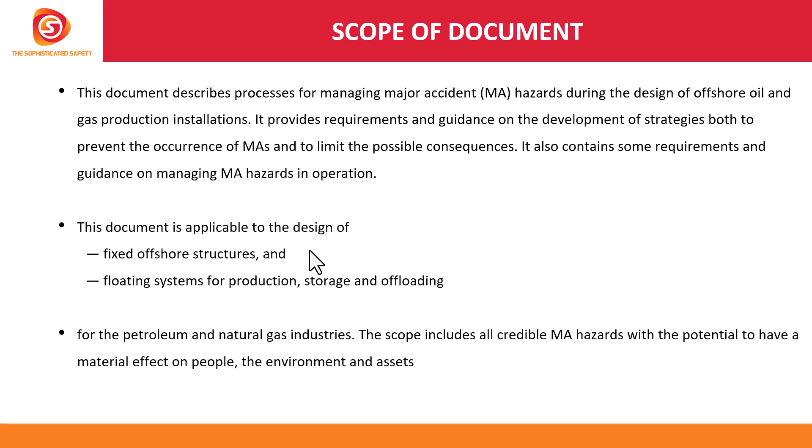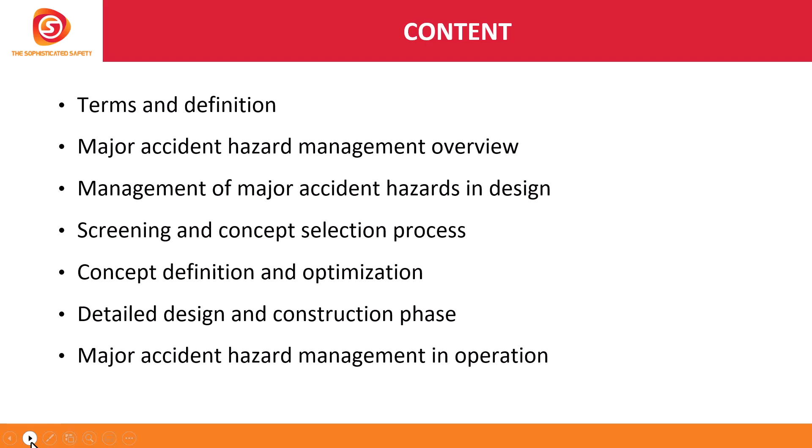Not the content of the slide presentation; it is the content of ISO 17776. This slide presentation only gives a short overview of ISO 17776. Okay. And then ISO 17776 contains several annexes, known as Annex A, B, C, D, E, F.